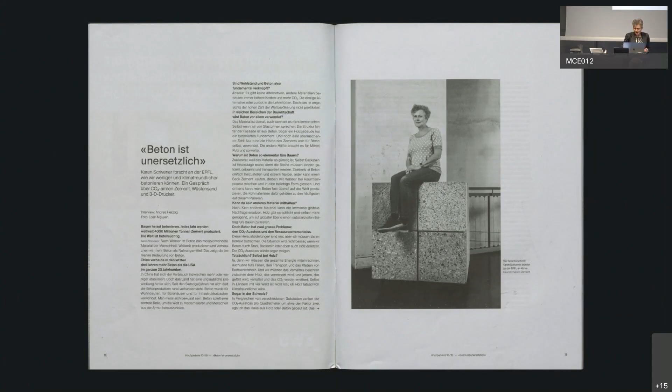So what I'm going to talk about tonight is concrete, what we can do about it. And I think many people have this very negative idea of just what a lot of CO2 cement and concrete produce, but I thought we'd start with a little quiz.

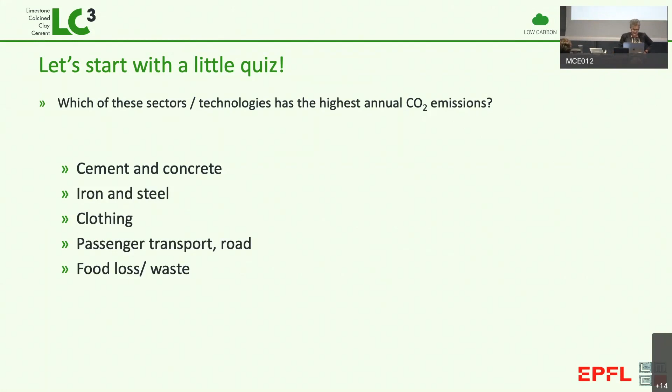So I'm going to put up here several different activities and see if you can work out which of these has the highest CO2 emissions. So of course we have cement and concrete, iron and steel, clothing, passenger transport on the roads, food loss, food waste. So I'll give you a few seconds to think. Make up in your own mind what you think of these, which of these you think comes out on top.

And then we'll have a look at the answers, and I think it might be a bit surprising. So cement and concrete is usually considered to contribute between 6 and 8% of world emissions. Iron and steel, almost identical, 7%. This one's the real surprise. Clothing, 10%.

This is probably something we could all do something about. How many clothes do we have in our wardrobes we've never or hardly worn? Passenger transport, just passenger transport, not freight on the roads, 9.5%, and food loss, 6%.

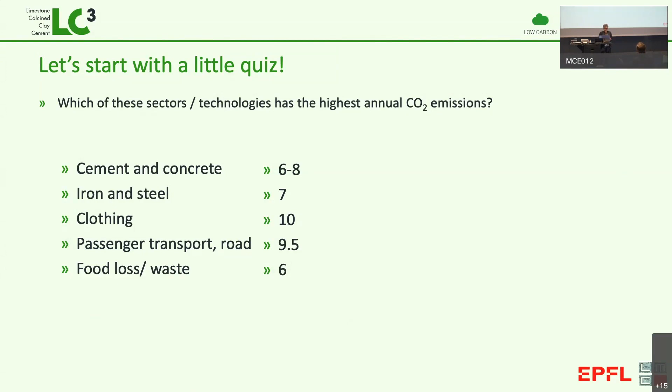So the important point is not to say that cement and concrete is nothing, but to say there's an awful lot of things that have this very significant contribution to CO2, and we need to think what we can do about all of these. Now, concrete has these emissions, but then if we look at the amount used, we see it's absolutely colossal.

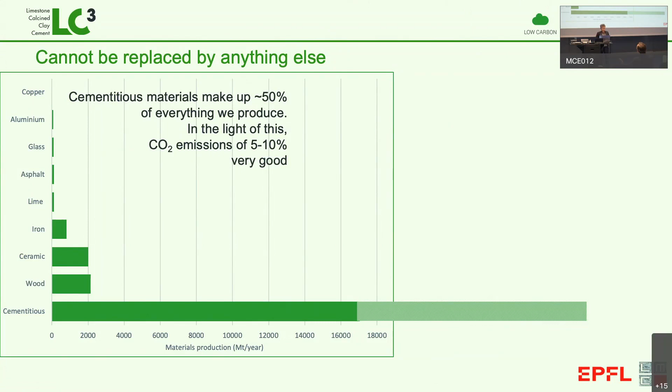And it's really this that explains why it has such big CO2 emissions. You can see also the other materials here are really quite tiny in proportion. So, of course, in Switzerland, we discuss a lot about wood. Of course, wood is a wonderful material. I've got nothing against wood, but there's no way it can make a significant impact on concrete. In fact, if we wanted to replace just 1/4 of the amount of concrete we use with wood, we would have to plant new, sustainable forest 1.5 times the size of India.

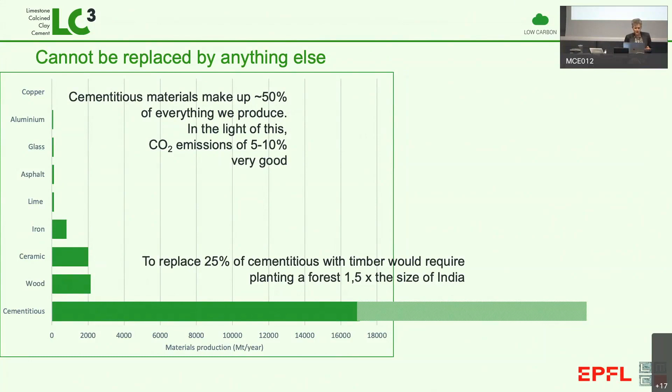And I think we know that there's so much competition for land use in the world, this is just simply impossible. So if we look at then the embodied energy and CO2, we also see again that concrete's way down in that bottom left corner. It has some of the lowest emissions per unit weight of any material we have.

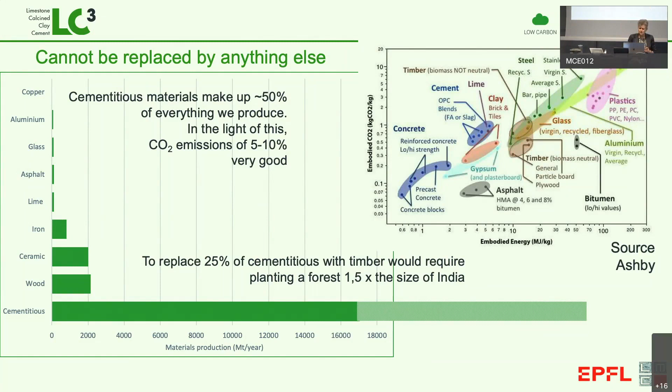So all of these are not excuses, because we can still do a lot, and that's what I'm going to try and present to you.

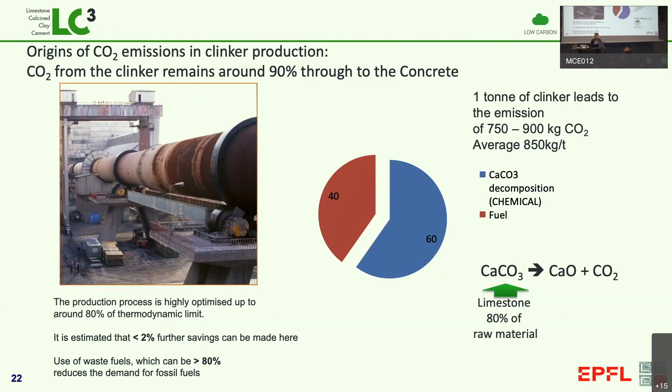Where the majority, about 60% of the emissions are coming from, is this simple equation on the right here, which is calcium carbonate, which is limestone, which is 80% of the raw material. During this process to make cement, it breaks down into calcium oxide and CO2. And that's where most of the emissions come from.

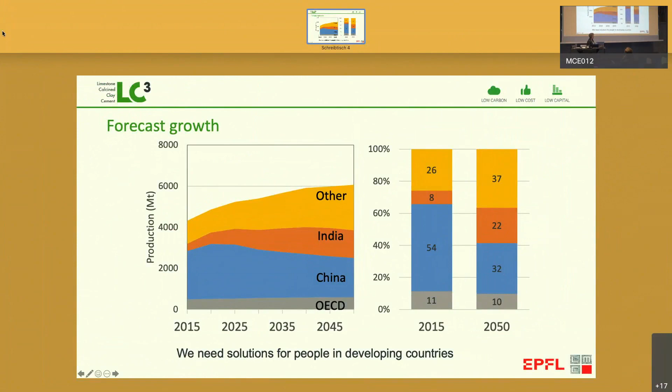Some other things that are important to realize are where cement is being used today and in the future. Today, more than 90% is being used in developing or emerging economies like China, etc. This China, of course, probably has peaked. It's reckoned that this is now decreasing, but there's many countries coming along behind.

India, for example. In India today, the consumption per capita is about 1/5 of what it is in China. And of course, India wants to develop. There are still many people without decent housing, without even decent toilets. And this is going to mean that this proportion, about 90% in these countries, is going to stay like that.

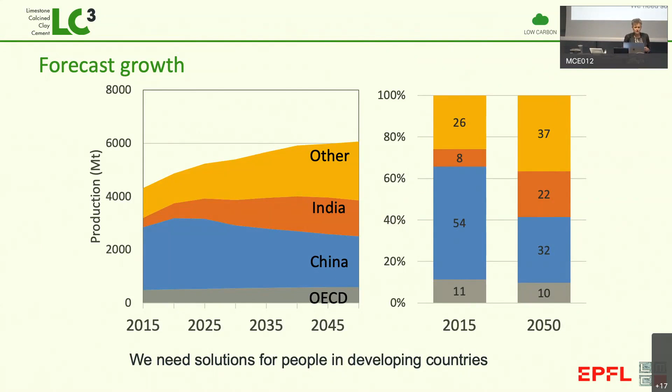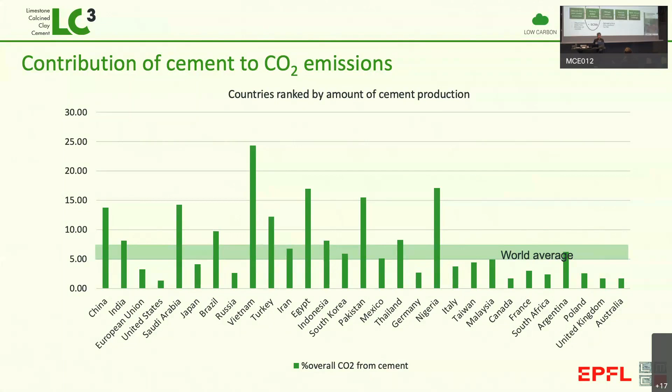Well, I think the most important thing we have to understand is there's no one single solution. And what we really need to do is work at all stages of the process.

So I talked about producing cement, or more correctly what's called clinker, which is produced in this cement kiln. And there already, there's been a lot of improvements.

We can then work at the cement level, replacing material in cement, and that's mainly what I'm going to talk about today. But that's not the end of the story.

It's important we can follow through those gains into the production of concrete, into the buildings, where there's also significant reductions to be made, and also by more efficiently using and reusing buildings. And of course, it's very nice to be here in what's really a reused building.

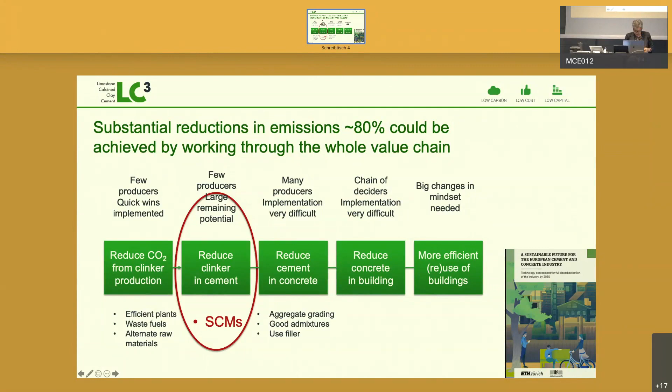So, first question people ask: most of the CO2 emissions are coming from limestone. Can we make cement without limestone? Can we make it with a different chemistry? Well, the short answer is no, and I'll try to explain why.

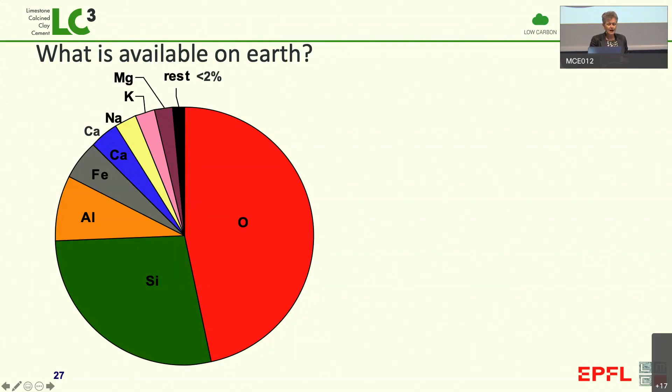The main reason is we have to look at the composition of the Earth. It's always remarkable that more than 98% of the Earth's crust is made up of just 8 elements: oxygen, silicon, aluminium, iron, calcium, sodium, potassium, magnesium. So clearly, for something used in these enormous quantities, there's no point looking at the other elements in that remaining 2%, because they're going to be much too expensive and not available in the quantities we need.

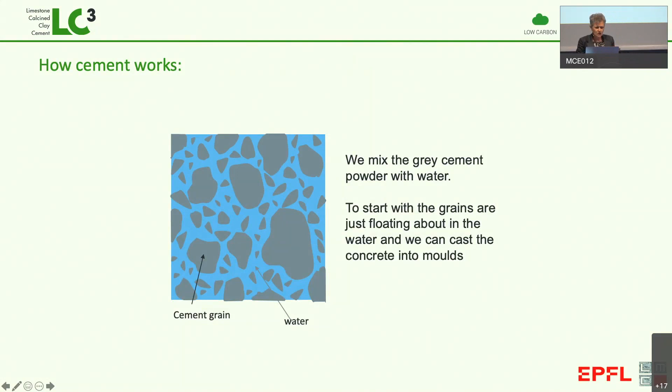And then we need to think about how does cement work? It's a very interesting process because we start with this material where we have gray grains floating around in water, and that's what makes it nice and fluid. You can make it into all these different shapes, transport it onto site. And then what actually happens is those cement grains dissolve.

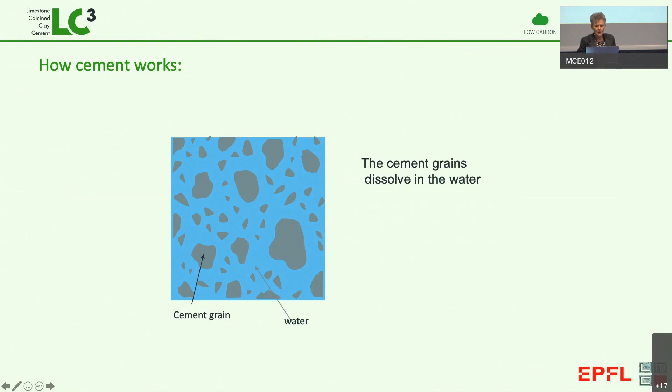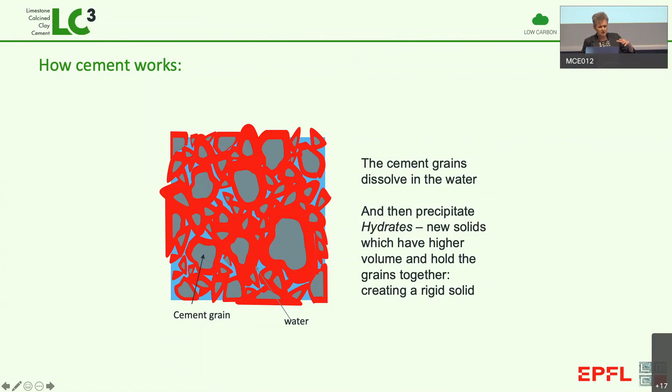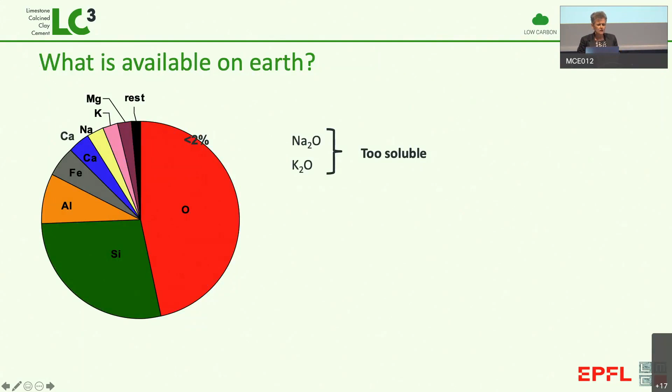So if we go back to this composition of the Earth and look at the different oxides, we find that the oxides of sodium and potassium are too soluble — they dissolve fine, but don't deposit the hydrates. On the other hand, the oxides of magnesium and iron have the opposite problem: they don't dissolve enough, so they just stay in the same place.

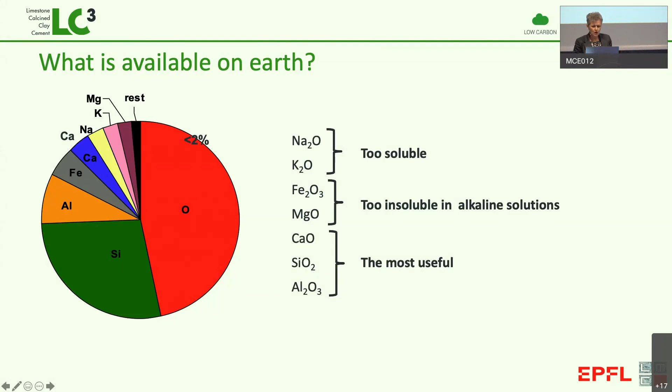This means we go from the whole composition of the Earth to a system of just 3 oxides: calcium, silicon, and aluminium. We've been studying this system for well over 100 years now. We know everything about it, and we know all the phases that form.

Unfortunately, life is not so simple, because to form these compounds we need minerals that contain much more alumina compared to silica. This brings us to minerals like bauxite, which is much more locally distributed.

It's expensive, and of course it's used to produce aluminium. In fact, even if we took all the current world production of bauxite and diverted it to produce these cements, we would only be able to fill about 10% of demand — and that would mean we had no aluminium either. So clearly, they can be interesting on a very small scale, but they're not really going to solve this CO2 problem.

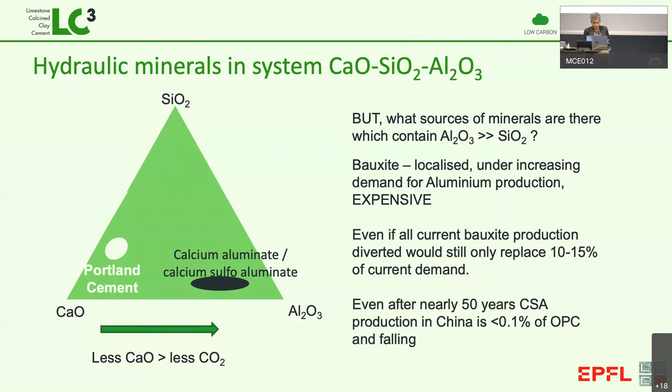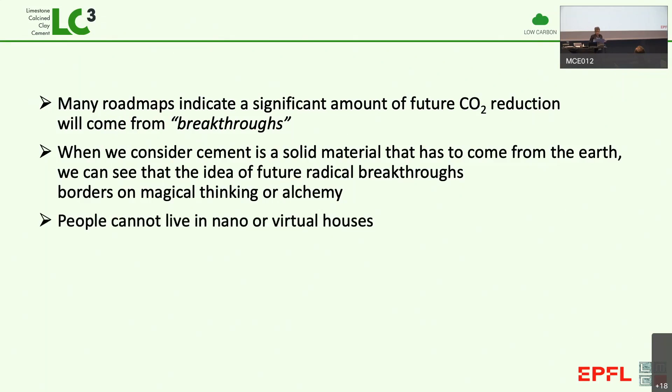Nearly every week I have journalists phoning me up asking about some publicity given to a supposedly wondrous solution. Everybody has this idea that there's going to be some miracle breakthrough out there that we haven't discovered yet. But what I've tried to explain is that we have this composition of the Earth, and this is not going to change. We know the chemistry of these materials. There's nothing out there to be discovered because it's a solid material. It has to come from the earth, and people can't live in nano or virtual houses. So a lot of these ideas people are coming up with are really verging on magical thinking or alchemy.

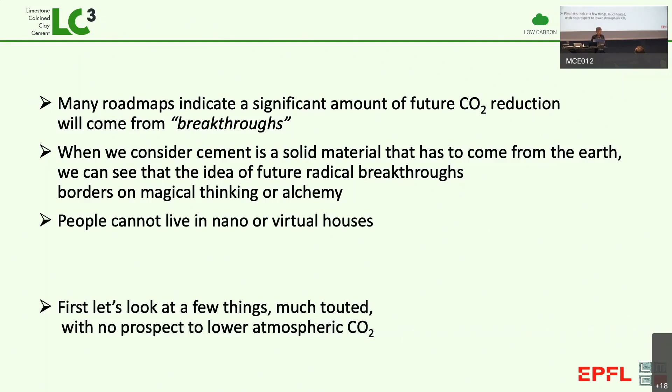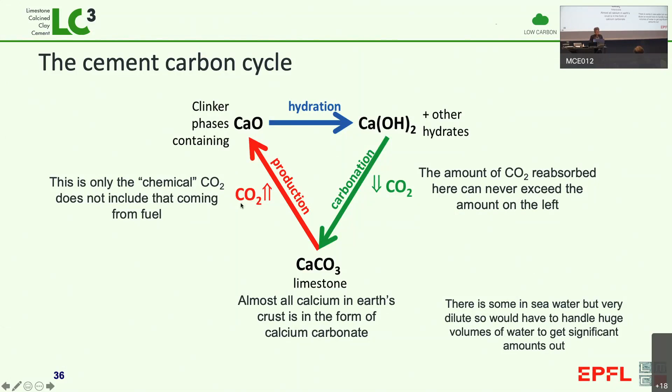One of the most common fallacies comes back to the basic way CO2 is produced in the first place. We started with limestone, and almost all calcium in the earth is already in the form of calcium carbonate, or limestone. During the production of cement, it gives off CO2 and forms compounds containing calcium oxide. These react with water, and over time, that concrete can reabsorb CO2. But it's fairly obvious it can never reabsorb more CO2 than it gave off, because that's the basic law of conservation of mass. So there are people who say, if you add calcium oxide or calcium hydroxide to your concrete, it can absorb more CO2. Well, that's true, but where are you going to get the calcium oxide or hydroxide from? If you get it from limestone, it already gave off CO2 during production, and you've gained absolutely nothing.

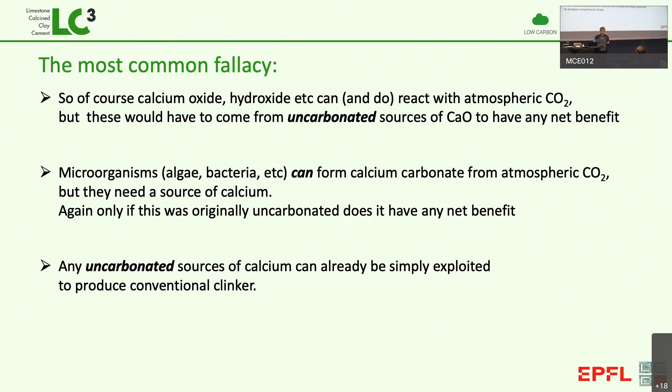Other people have wonderful ideas that you can take algae and they can make calcium carbonate. Again, that's true—that's how limestone formed in the first place, by microorganisms in the sea taking calcium and CO2 from the atmosphere. But only if you feed them calcium which was not carbonated is this going to go anywhere. So you can see that this really is just nonsense. In fact, if you have sources of calcium which are not carbonated, you can just easily use them to produce conventional clinker.

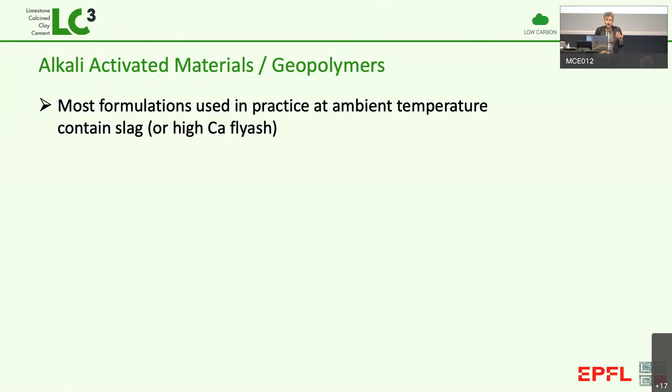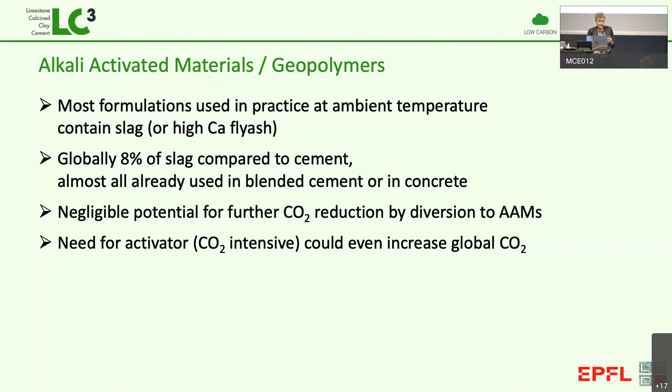Then lots of other people talk about alkali-activated materials. Well, the long and short of this is that they use substitute materials which, as I'm going to tell you, are in short supply, and these are already used in cement. So again, we can have no gains here. In fact, overall we might have a loss, because we have to produce the alkalis to activate them—and that's without even talking about the technical issues associated with these materials.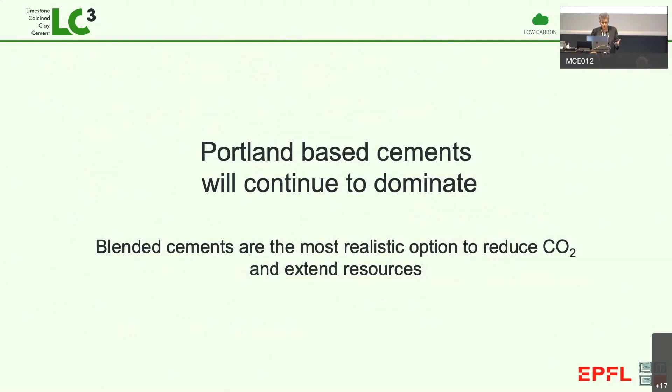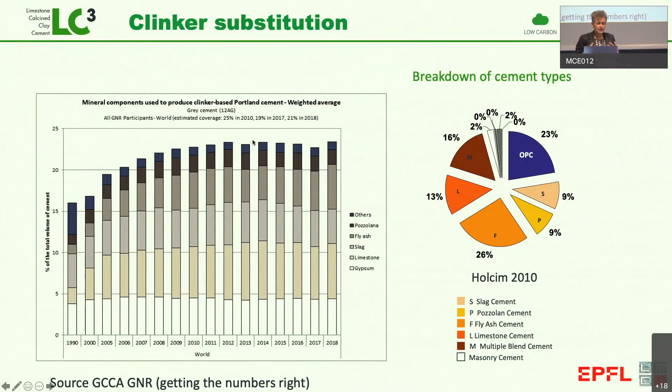So we have to face the fact that this Portland composition is going to dominate. What we can do is substitute quite large proportions of Portland cement with additional materials—this shows you the worldwide figures. The materials most used as substitutes are, first of all, limestone, then slag, which comes from producing iron in blast furnaces, then fly ash, which comes from burning coal to produce electricity. In the 90s this technology really took off and substitution levels increased rapidly, but for the last 10 years or so it's more or less stagnated, simply because we don't have very much of this slag and fly ash.

We're recycling more and more steel, which is of course a good thing, but if you have more steel from recycling, you have less produced from blast furnaces, so less slag. Similarly with fly ash—coal is the number one source of CO2, and many coal-fired power stations have shut down. And of course we don't have either of these materials in Switzerland. We do have a lot of limestone, which is the most used, but the problem is we can't go to very high levels of substitution without simply diluting the properties of the concrete.

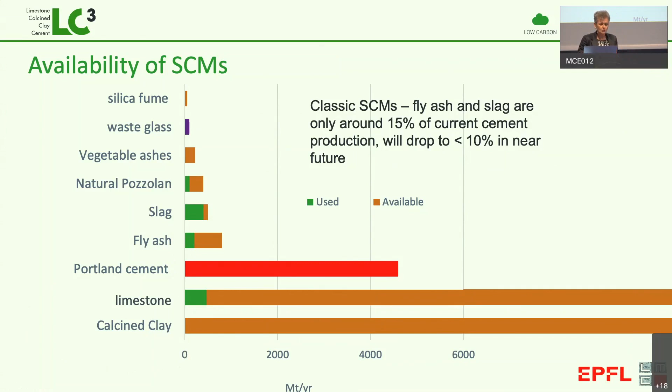The one thing we do have, which is a real game changer, are clays. Clays are super abundant, available everywhere, and can simply be calcined—that's to say heated—in the range of only about 800 degrees, much lower than making cement. This is what led us to the technology we call LC3. LC3 simply stands for limestone calcined clay cement. We started off calling it low carbon cement, but then we realized everybody was calling their solution low carbon cement, so we just wanted to be factual.

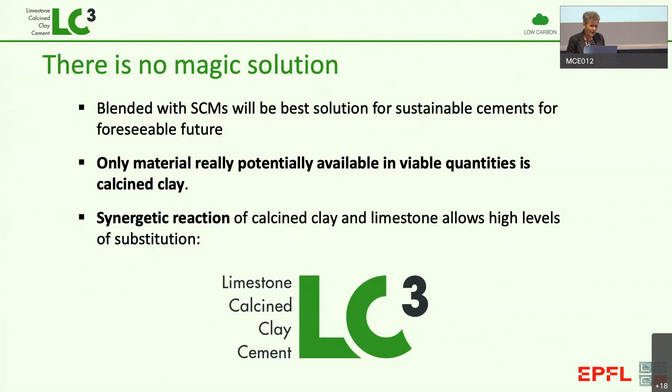What's interesting about this LC3 is that by putting the calcined clay together with limestone, we can go to much higher levels of substitution. So this would be the composition of, say, a cement including fly ash: you would have about 70% Portland cement and about 30% fly ash.

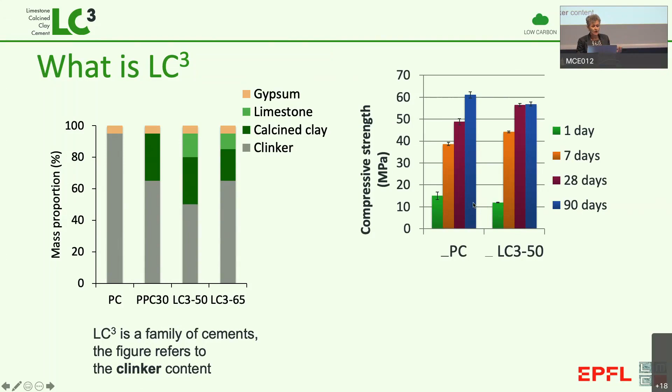Now, in LC3, we can take out another 15% of that very high CO2 emitting cement and replace it with limestone. And limestone, if it's just ground up and not heated, is a very low CO2 material. With this, we can gain similar strength to the reference Portland cement—slightly lower at 1 day for this experiment, but you can bring the strength back up even at 1 day with grinding and other technologies, and by 7 days it's stronger, 28 days it's stronger.

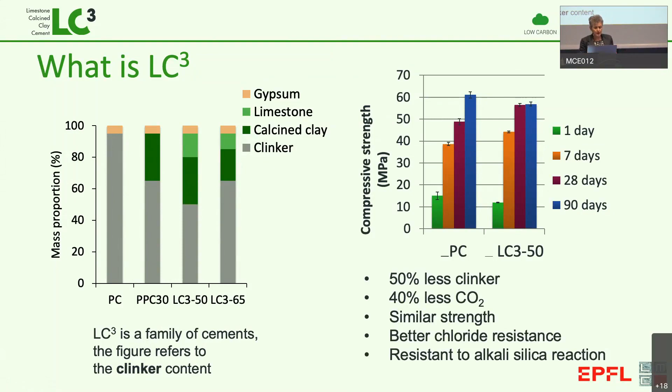So here we have 50% less Portland cement. This amounts to 40% less CO2 emissions, similar strength, and some properties like resistance to chloride ions and alkali silica reaction are very much improved.

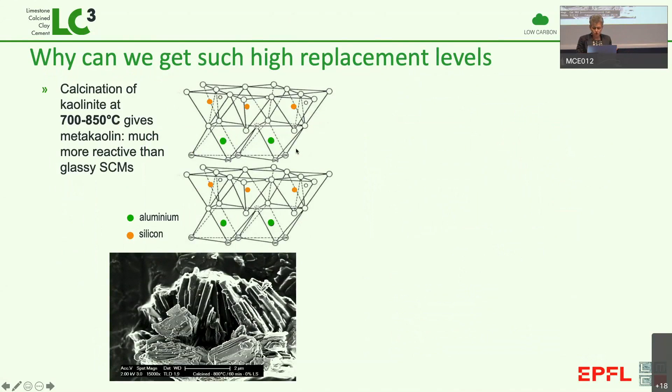Now, the reason we can get this very good reaction is because of the clay structure. Clay has this layered structure—you can see this at the atomistic level. You have a layer of silicon and alumina together, and when you heat these up, they become disrupted, and the alumina can react with the limestone to form compounds that fill space and contribute to strength.

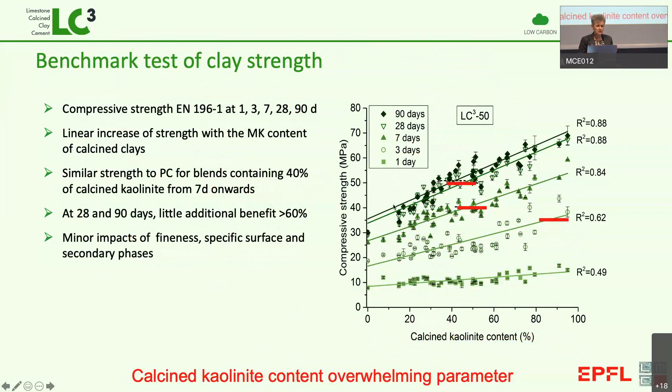So we've now tested more than 70 clays from all around the world, and basically we see the performance correlates simply with the amount of kaolin in this structure. Kaolin is one specific clay type, but it's distributed very, very widely around the world.

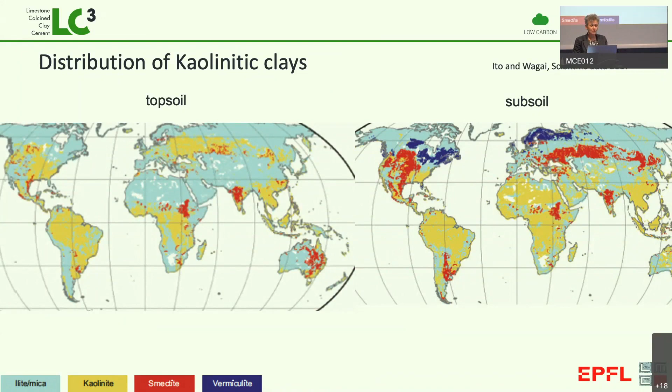So in these maps, anywhere you see this kind of yellowy-orange color, either in that one or that one, you will have suitable clays. You see this very widely available in countries where the demand for cement is going up strongest—South America, Africa, Southeast Asia—but even in Europe we've got very nice deposits. I didn't think there were suitable clays in Switzerland, but last week somebody told me they've managed to find quite good deposits also in Switzerland, and some companies are trying these out to see if they work.

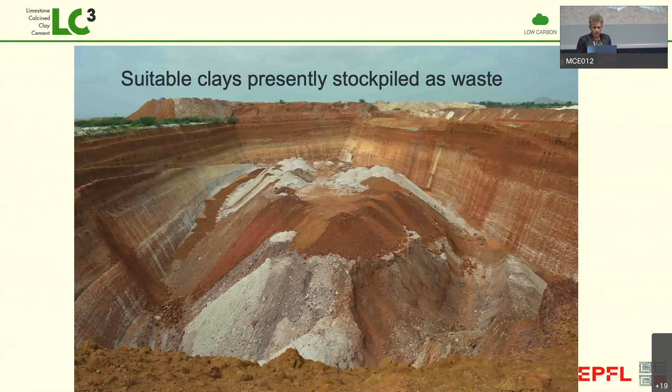And in many countries, these are actually waste materials. This picture's from India, and it shows clay deposits which have been exploited for making pottery, toilets, and these kinds of things—this is the waste material they can't use. In fact, we've got better properties than the materials people use today, the slag and the fly ash.

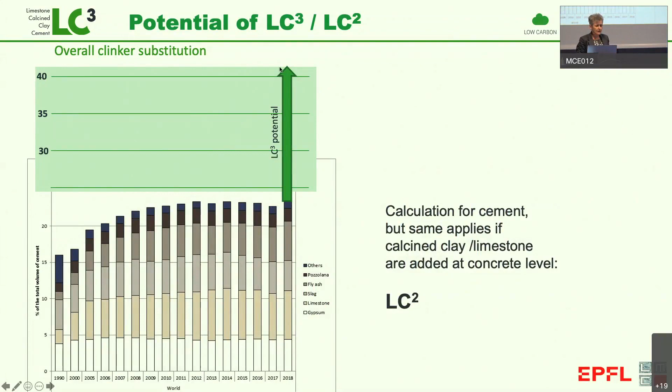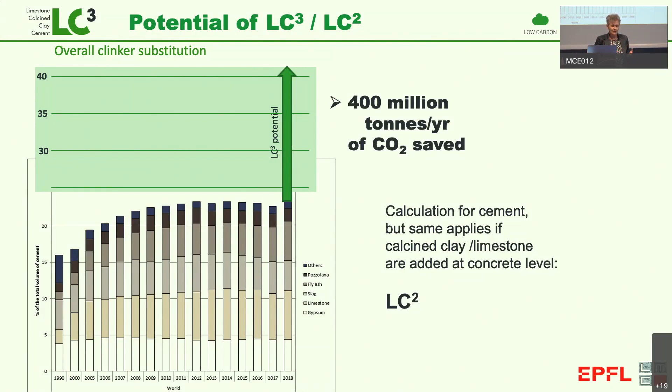So if we go back to this picture, showing the level of substitute materials in the world, you see this has stagnated just below about 25%. On a basis of technical performance, we know we could go to a level of substitution on average of about 40%. If we calculate this extra we could get, it amounts to 400 million tons of CO2 per year—just to put in context, that's 10 times the entire emissions of Switzerland we could save on a worldwide level.

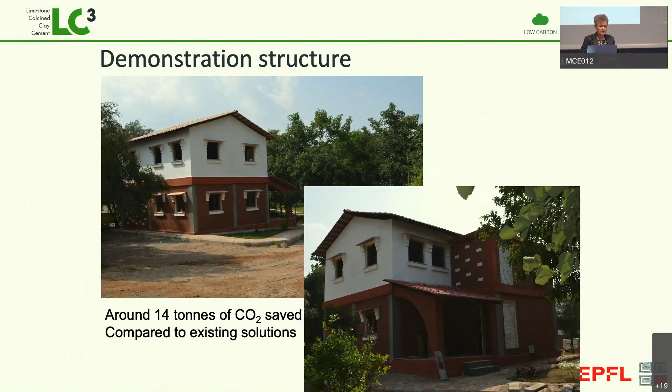And this is not just a nice idea in the lab—we've produced it in full trials. This is the demonstration house we built in India. We could calculate that this saved about 14 tons of CO2 compared to existing solutions. We can even use it in quite demanding pre-stressed applications.

A quick look at some advantages and disadvantages. The first thing people said was people won't buy red cement, and clays are often red. Well, you could think if it's low CO2, they should be proud of having red cement, but apparently the market doesn't want red cement. You don't have to have red cement though—you can have nice gray cement.

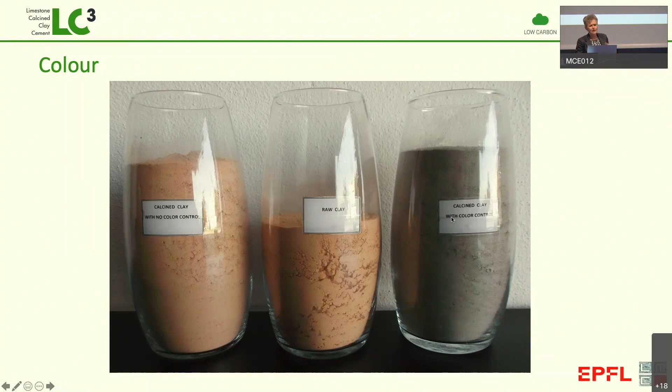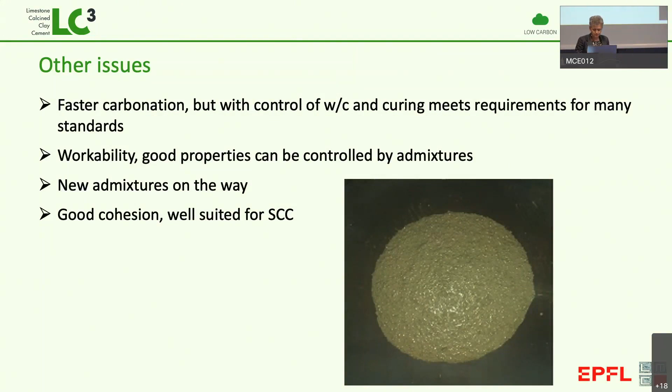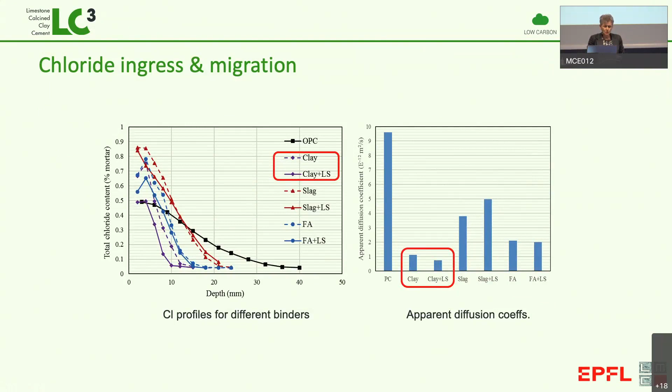And then people say, well, what does this cost? Again, good news, because it can be cheaper to produce than the existing materials.

This is the situation in many parts of Africa, because Africa doesn't have many deposits of limestone. That means many countries are importing cement clinker and grinding it locally to produce cement. They haven't got much limestone, but they have got lots of clay, and if they produce calcined clay locally, they can achieve very big savings compared to reference Portland cement.

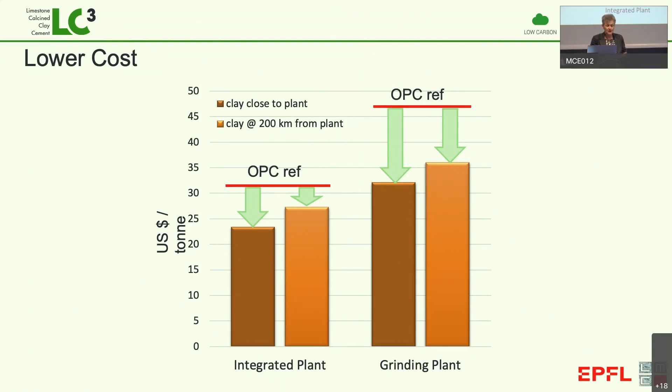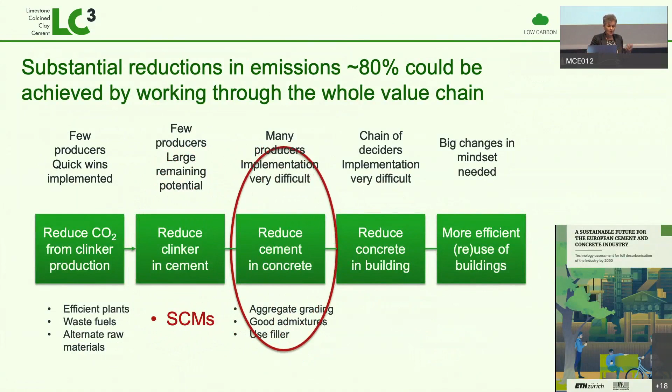Before I finish, I want to come back to the slide I showed earlier about the value chain. I want to emphasize: please don't forget what happens next, because it's all very well having this 40% saving at the cement level, but if we use much more cement in the concrete than we need to, that can more than wipe out all those gains.

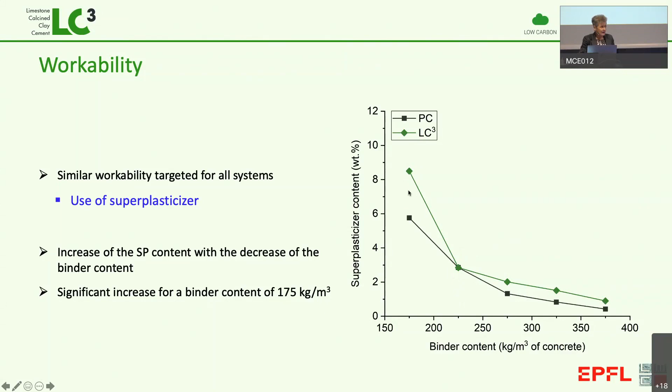In terms of strength, the strength is actually better when we have a lower cement content. You have less problems of overheating, less problems of shrinkage and cracking. If we look at all of this in terms of CO2 savings, you can see you can save as much by working at the concrete level as you can by working on the cement itself.

So this is a very simple thing. People say, well, you have to use more admixture, but the price of the extra admixture was way more than compensated by the amount of cement you saved.

Unfortunately, most norms impose a limit for the minimum cement content - typically 300 kilos per cubic meter is the limit for most specifications in Switzerland. So we could do a lot better than we are doing, but we can't go beyond that, because unfortunately these norms were put together before the days of admixtures, and that minimum cement content is what you would need to get the correct water-cement ratio without admixtures. So here there's also work to do.

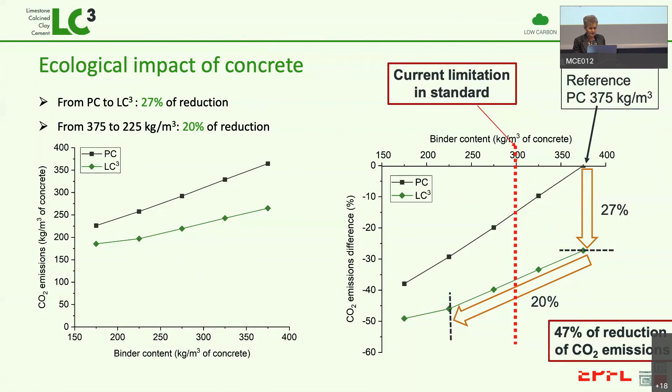This is just a simple illustration that, as I said, things don't stop at the cement level - you have to follow through the whole value chain.

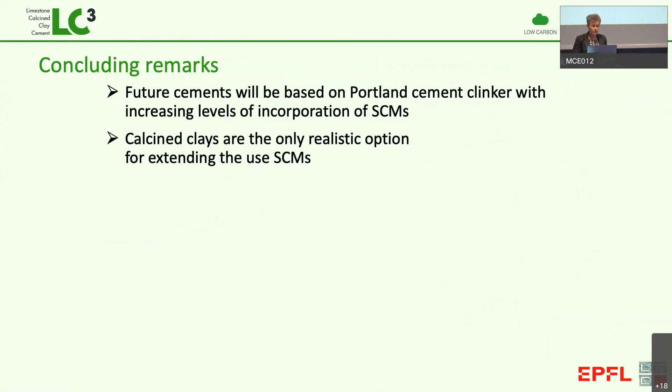To summarize, I hope I've convinced you that Portland cements are here to stay, and what we need to do is work on this technology of introducing more supplementary materials. Because of the shortage of slag and fly ash, the only realistic option to do that on a global scale is calcined clay. We can get very good properties with only 50% clinker, and with clays that have quite a low kaolin content, which can be available as waste. These can have advantages particularly in terms of certain durability issues like chloride ingress, which is the number one problem, and alkali silica reaction, which is affecting about 20% of our dams here in Switzerland.

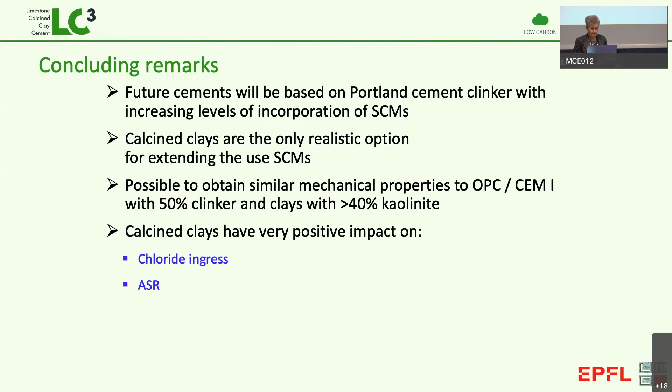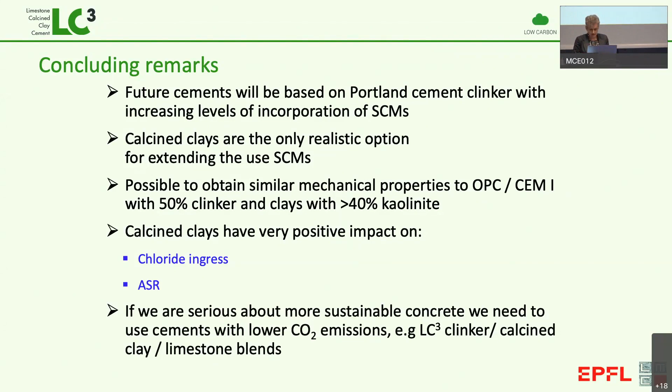So I think this LC3 has a very serious role to play in lowering the CO2 emissions of cement and concrete. I'd like to thank you for listening, and hope you found something of interest, and maybe you have some questions.

Yeah, thank you very much.

One of the first things which I kept in mind is that we have to change the norms. Is that true? What would you suggest?

Well, people are already working on that. A little bit the issue is that the best is the enemy of the good, as people sometimes say. So people say we should have performance standards instead of rules like this X amount of cement and this water-cement ratio. The problem is it's really difficult to judge performance when you're talking about a building that's going to be there for 50, 100 years, and you want to do a test in the lab in a few days. So for more than 10 years, people have been arguing about this and nothing's happened.

Where if you actually got rid of these minimum cement contents and just focused on water-cement ratio, which is the important criteria, you could already make a step in the right direction very quickly. But people say, oh well, we've got to go to performance standards, and honestly this will take another 10 years. That's very sad because we haven't really got 10 years. We know by 2030 we've already got to reduce CO2 emissions by 50%.

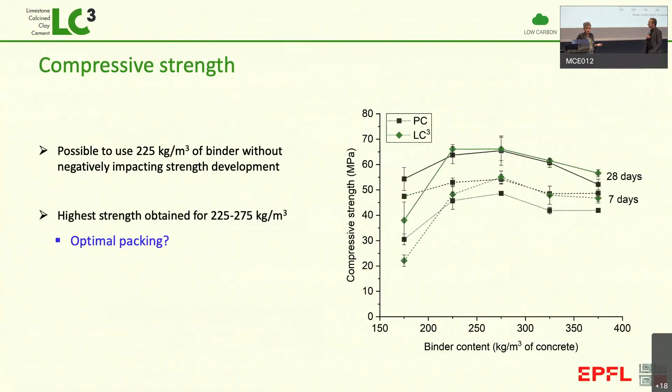This is very important because we have this big debate about what material we should use. The wood lobby says, look, I can build this building in wood and it's got this amount, and this building in concrete has got that amount, which is much higher. But that's not true. If you build efficiently in either wood or concrete, you come to about the same embodied CO2. But if you make a comparison with an inefficient building, of course you can make any argument you like, and you can make it both ways.

Well, in Switzerland, we are especially inefficient, if I think of the 28 centimeter ceilings we build today as a standard. But it's not the civil engineer who tells us we have to build 28 centimeters, it's the acoustic engineer. Yeah, okay, there's an awful lot of things like that.

I can't pretend to be an expert on that, there are other people who study that more than me. But certainly it's well known that for floor slabs, you can often save 50% of material without much loss of acoustic properties. And there are other ways you can improve acoustic properties. That's perhaps also an argument for, if you're going to use this massive amount of concrete, well, perhaps you don't need to make it to the same strength.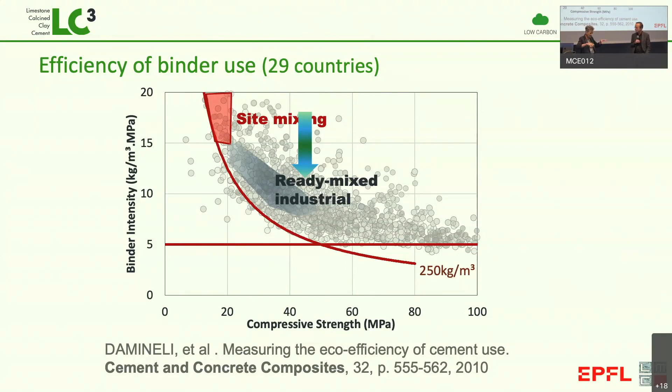Well, they sound simple, but they're actually very difficult because the whole way the process happens has become so divided, and people aren't talking together.

And what do you think if you look at the infrastructure construction in this country, tunnels, bridges, and so on? Sometimes it seems to me that's quite a lot of concrete we use there compared to... Yeah, but that's what you see.

But in fact, usually the amount of infrastructure is the minor part, and the housing and everything is the major part. And of course, for infrastructure we have a criteria that we want this to last a very long time. We don't want to replace tunnels every 10 years, whereas buildings are often demolished after maybe 40 years, not because they've worn out, but just because we want to build something else in their place. So this is the sort of thing we need to think about. That's true, that's where we should keep the buildings a little bit more.

So I want to open the discussion to any questions. Yeah. I have two questions. Clay, I understand, but what is calcined?

Calcined just means heated up. You have to heat the clay to about 800 degrees to activate it. If you just use raw clay, it's not going to work. But you heat it to about 800 degrees, and then it becomes this active material because the whole crystal structure gets completely disrupted, and then it reacts with calcium hydroxide and with limestone, giving you these good properties.